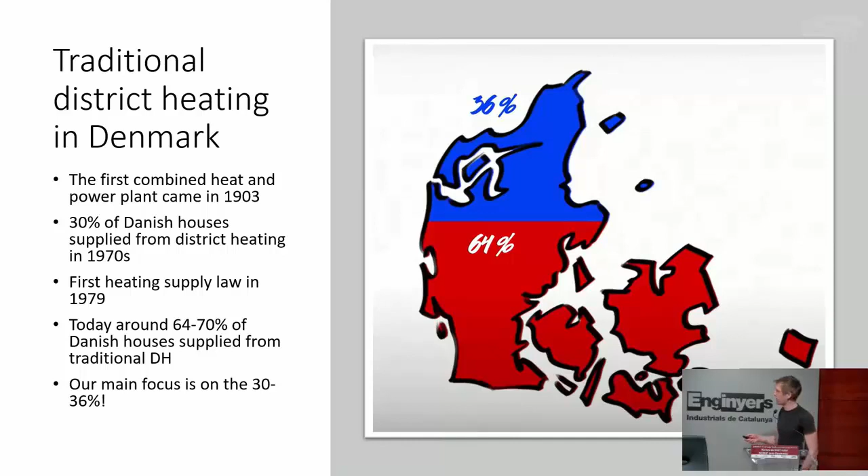But a third of the country does not have district heating, because we have a lot of natural gas and other sorts of heating supply in those areas. There's quite a good reason for that, because the paradigm we've been working with in Denmark up until now has been that heating is a matter of combustion—you have to burn stuff to get heat.

Denmark is a fairly cold country. You can see from the whiteness of my skin that we don't get a lot of sunshine. So we don't actually think a lot about cooling in Denmark, but that can become a problem because we think a lot about insulation, and we do get some warm summer days.

The paradigm we have established in Denmark is that cities have centralized combustion units that distribute heat through insulated pipes at fairly high temperatures. We are trying to lower it, but we don't get below 60, 70 degrees because we need to supply hot water. Rural areas have a problem because the energy density is not high enough for this scheme to work, so we have natural gas, oil boilers, wood burners, and stuff in the rural areas of Denmark.

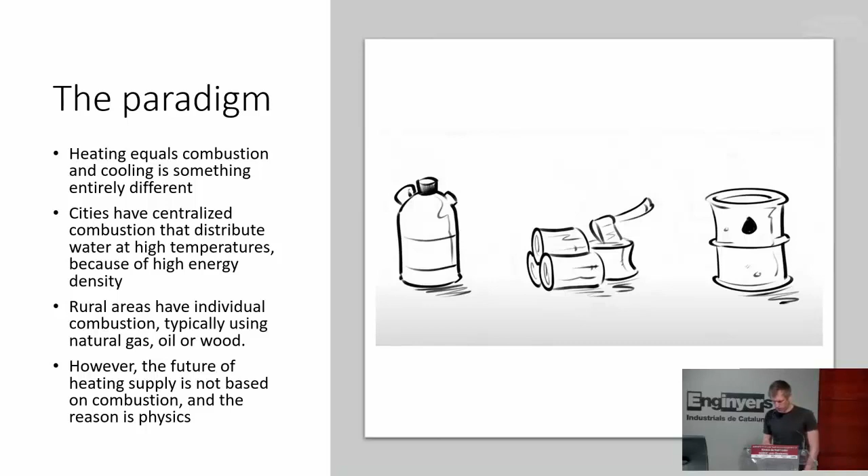But the future of heating supply is not combustion, it's heat pumps. I'm sure all of you have already heard that. I have recently become very fond of saying that this is not a matter of politics, it's a matter of physics. But of course, physics is not always the thing that gets into the politics.

So I like to show this slide about how you can use 1 cubic meter of natural gas. This is from an old cartoon we made in 2017. You can use, in Denmark, 1 cubic meter of natural gas to burn at the house in a natural gas boiler, and you get 11 kilowatt hours of heat from that 1 cubic meter of natural gas.

But you can also do something we are fairly good at in Denmark: move the natural gas through the pipes to a combined heat and power plant. Then you can get 5.5 kilowatt hours of heat and 5.5 kilowatt hours of electricity, roughly.

You can transport the electricity to a house that has a heat pump connected to the ground, and you can multiply the heat by extracting heat from the ground and get somewhere between 22 to 27.5 kilowatt hours from the same cubic meter of gas. So you can more than double the outcome of heat from the same resource if you utilize heat pumps.

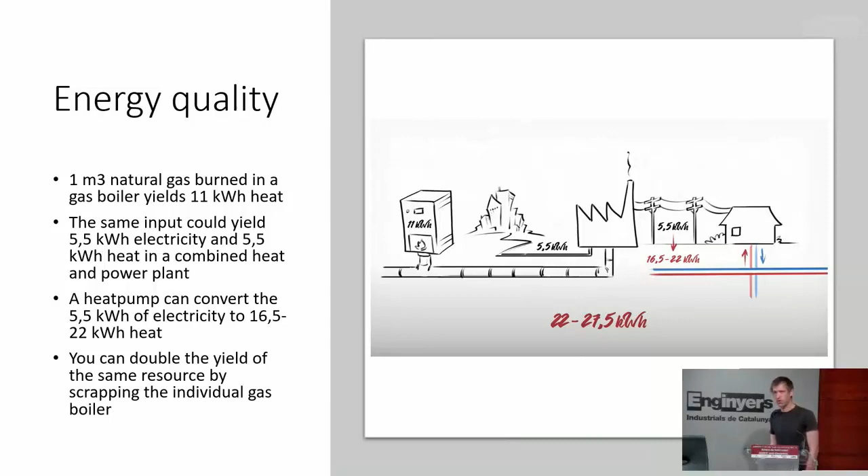This scheme of combustion in order to get power makes me sick to think of. It is so wasteful. It is just the old foolish Prometheus idea, and the father of Prometheus was a baboon. When we learn how to store electricity, we will cease being apes ourselves. Until then, we are tailless orangutans. We should utilize natural forces and thus get all of our power. Sunshine is a form of energy, and the winds and the tides are manifestations of energy. Do we use them? Oh no, we burn up wood and coal as renters burn up the front fence for fuel. We live like squatters, not as if we owned the property. There must surely come a time when heat and power will be stored in unlimited quantities in every community, all gathered by natural forces. Electricity ought to be as cheap as oxygen, for it cannot be destroyed.

So this is 1910, Thomas Edison. More recently, but still a long time ago, the American Amory Lovins made a similar statement, just much more politely and using scientific terms.

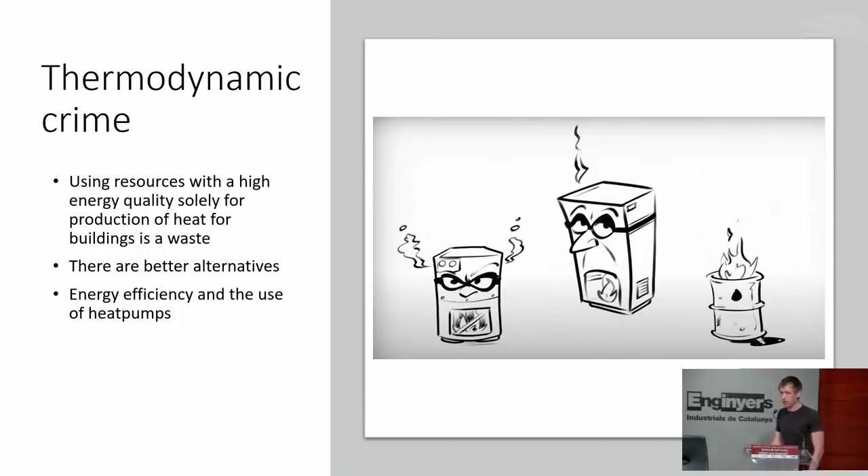As one of the speakers said, there is no good or bad energy, but there is definitely bad use of energy. Burning different sources like gas, wood, and oil for heating houses—that's low quality heating, that's a bad use of high quality energy. So this is just a way of portraying it as a thermodynamic crime. It does not make sense to do that. It's not to shame anyone, it's just saying don't continue down that road because it's not a good use of resources. There are better alternatives, and they are energy efficiency and the use of heat pumps.

When we talk about heat pumps, air is not a good medium to do that. This is a small drawing illustrating that.

This is a fairly known scenario in Denmark where there are 0 degrees Celsius outside. Let's imagine the building on the left is a freezing house where we store goods that need to be frozen, and on the right is a storage house that just needs fair storage temperatures. What the heat pump does is move heat out from the blue building, and on the other side it moves heat from the air into the building. So we have one heat pump on each house.

Now the problem is that we use air a lot as a heat source, but it's not very efficient, because when the air is cold we need the heat, and when the air is warm we need cooling. So there is a better way of doing that.

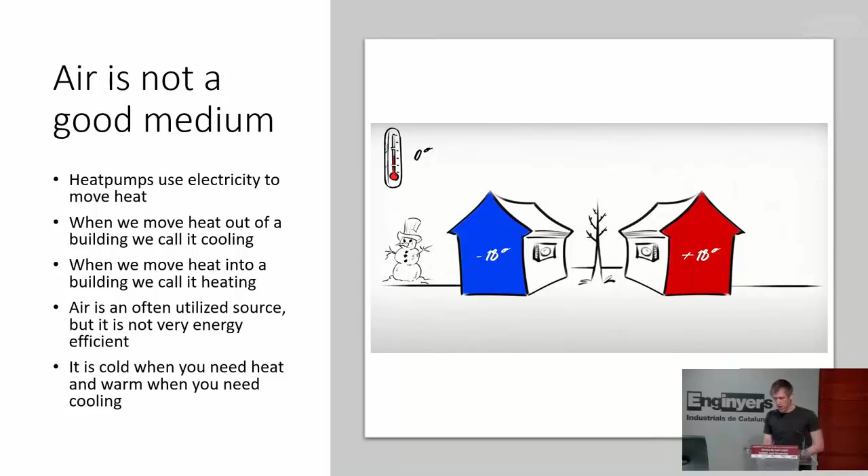The better way is to use shallow geothermal as a medium, because the Earth is a fantastic storage for heat when the temperature is low, because the ground is cool when the air is hot, and the ground is hot when the air is cool.

The other part, probably in my view the most important one, is that it's not noisy and it's not visible. You have a beautiful city here in Barcelona, but you have a lot of these air conditioning units. It would be good for the energy system to get rid of them. You would have more efficiency and a better use of energy, and it would brighten up the city.

We often overlook that from the technical perspective, we're just solving a technical challenge, but in the big paradigm of preserving a nice city, this should matter much more than anything else, the noise and the looks of things.

So what we can do when we start doing this, we can reduce the number of units. We can move the heat from the building that needs to be cold to the building that needs to be warm, and have fewer units, fewer heat pumps. Now this is of course just an illustration that works for this specific scenario, but I'll get back to that later.

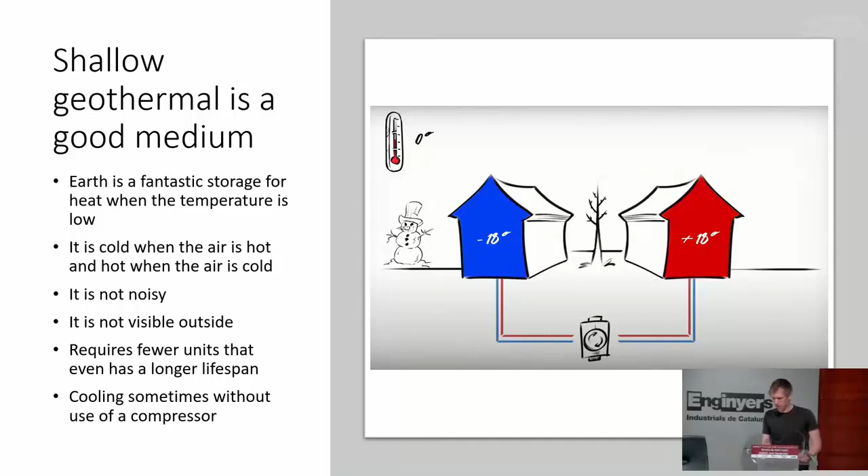The benefit of passive cooling I'll demonstrate with a simple graph from two buildings in Denmark on one of the days that in Denmark is hot. You see an average temperature rising up around 29 degrees. I know that's not really hot for these areas, but in Denmark we call that a very hot summer day. There are two different houses.

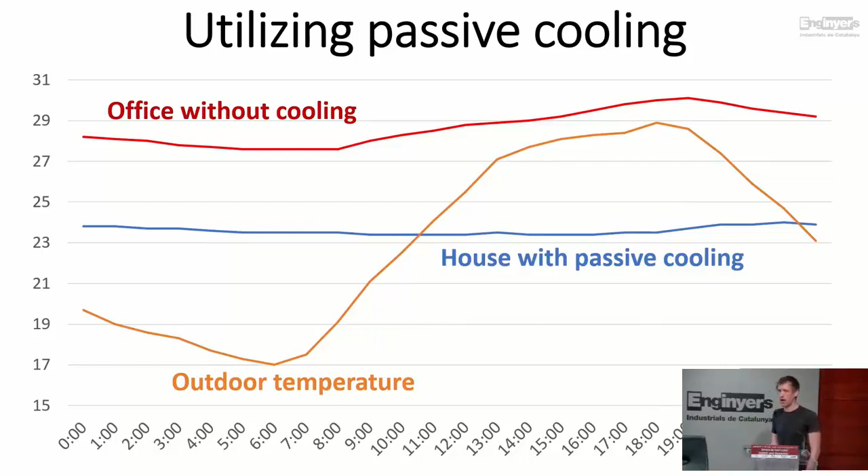There's an office building that doesn't have cooling, but it's very, very well insulated, so it can save energy in the winter. But that also means the heat inside the building is actually much warmer than outside, even during the nighttime. And then there is a house that can utilize passive cooling. It's just as well insulated, but you can move heat out of the house with boreholes.

This is where the idea of the Thermonet comes in, because with the Thermonet you can start connecting multiple houses and you get a bigger battery in the ground you can use to balance out the energy demands. The Thermonet is defined as a thermal grid that transports energy from different sources, crossing cadastral boundaries, at a temperature relatively close to the temperature of the ground.

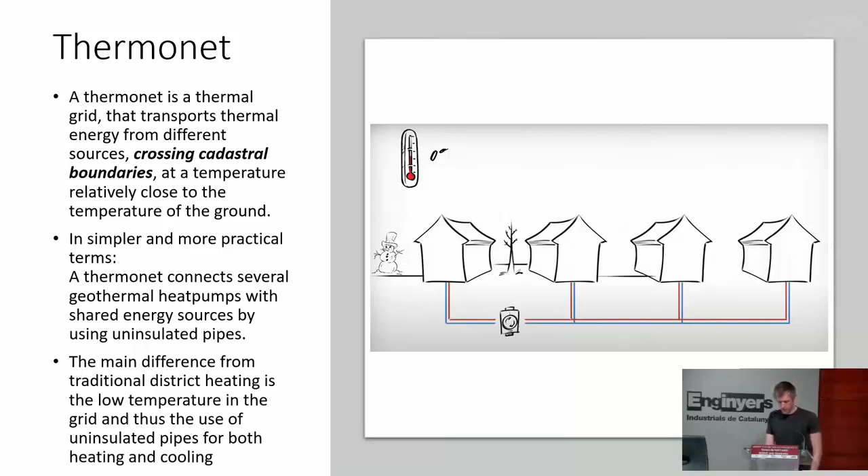So no insulated pipes - uninsulated pipes. That's one of the paradigm shifts, uninsulated pipes. In very simple terms, a thermonet connects several geothermal heat pumps with shared energy sources by using uninsulated pipes. The main difference to traditional district heating is the low temperature. Many of the other principles are the same that we know of in Denmark.

But you could also do the thermonet in combination with fourth generation district heating. So you have the fourth generation network putting out insulated pipes to the buildings from a geothermal heat pump of a bigger scale, and then you connect these big geothermal heat pumps with a thermonet of uninsulated pipes to the heat source.

In Denmark, we see a lot of private customers putting up air-to-water heat pumps, and we see a lot of utility companies putting up very big air-to-water heat pumps. And as I just showed you, air is not super efficient. There is a better way of balancing the energy demand with geothermal.

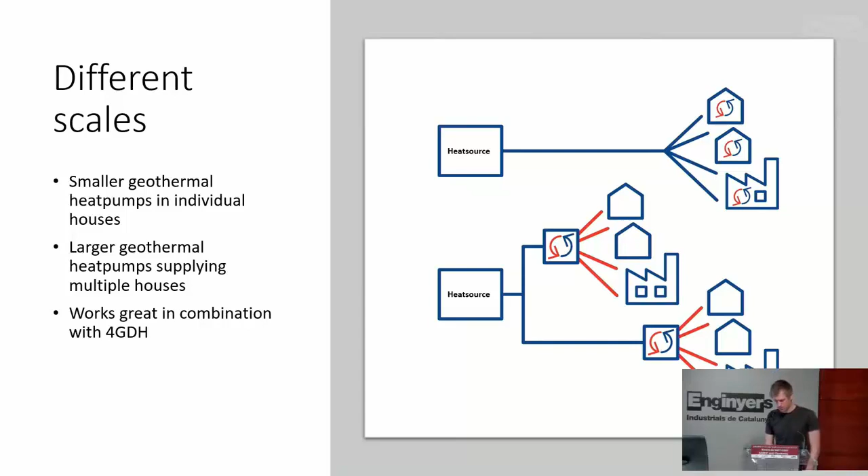So what are the novel issues we can solve by making a paradigm shift to the fifth generation of district heating? Well, there's a lot of academic discussion whether the fifth generation actually exists, and that mainly comes from researchers in fourth generation who think that this is a well-established concept and there's no need to have a fifth generation, because they already include in the fourth generation what they think the fifth generation set out to do, mainly introduce heat pumps and renewables.

But that's not at all what the fifth generation's most important contribution is. The most important contribution is that we extend the reach of district heating. In Denmark we usually say we have around 60 to 66% district heating coverage, and some cities don't have access to it. The most ambitious plans for Denmark are to increase district heating to 70%, but that's only from the fourth generation perspective. If we look from a fifth generation perspective, energy density is not important anymore. There can be bigger distances between houses, and it would still make sense to do district heating with a thermonet. So we postulate that you can go up to around 90% or even more district heating coverage in Denmark if you use fifth generation.

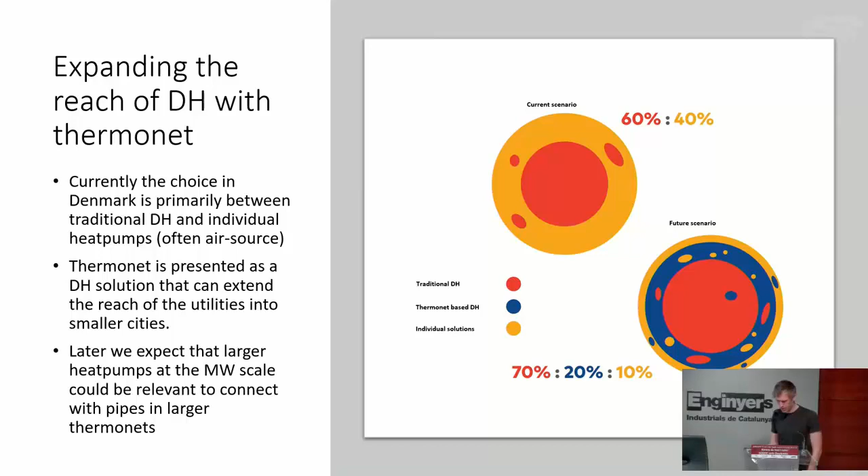So how do you introduce a paradigm shift? Well, one of the things we have found in Denmark works very well is to use a word that no one has ever heard of before, and that is thermonet. When you talk about these generations of district heating, you come across the issue that a lot of people think they know what you're talking about. They think they know it's about some insulated pipes and that you're just lowering the temperature even further. But that's not the case with a thermonet — you're pulling the insulation off the pipes. So in order to establish a common understanding, it's very good to start from a completely blank sheet.

So we introduced this word, thermonet, in Denmark, and we made a non-profit association to promote the spread and development of the thermonet.

The heat pumps are coming in Denmark, we know that for sure. We are just working to make them connected with pipes instead of being air source heat pumps. And we really stress this synergy between heating and cooling, because it's so beautiful to see when you remove heat from a building that you put it into use in another building instead of just cooling into the air. And we really want the thermonet to enjoy the same benefits that traditional district heating has in Denmark through the heating supply law.

And we have a wide array of members. We established the organization in 2020, just before the virus hit, so we set out to be a virtual organization. We hold mainly virtual meetings because we want to span as wide as possible. We have 25% of the Danish municipalities as members of the association now, and we have utility companies, installers, contractors, manufacturers, academics. We have a wide array of members, and that is exactly what you need for a paradigm shift.

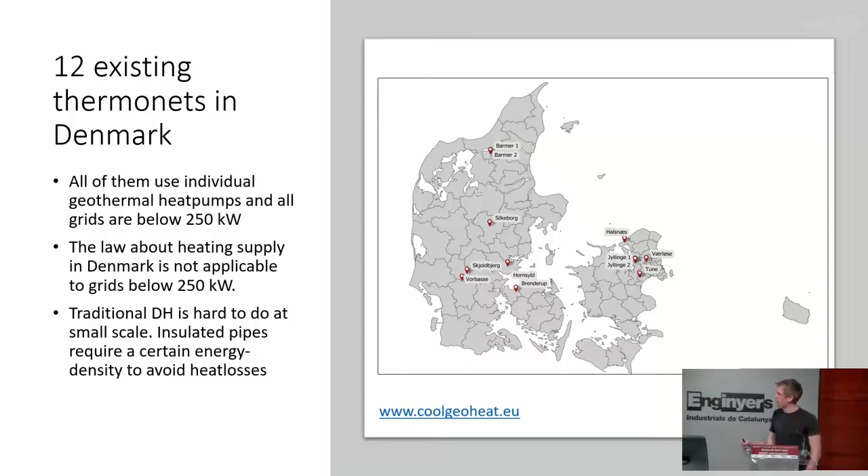The traditional district heating is very hard to do in these places. It's simply not offered, because we don't have the energy density in these areas to provide traditional district heating.

Now this is the lighthouse project that is currently under construction. This is the first district heating grid based on a thermonet in Denmark that is above 250 kilowatt, and thus constructed under the heating supply law. And it's a local district heating company that constructs the grid.

And this is where the societal benefits come into play, because this small rural city, they don't have a lot of opportunities to borrow money for renovation of their homes, and they don't have a lot of opportunity for borrowing money to establish heat pumps. But the local district heating company, they can go into a city like this and offer them, for an investment of zero, to get their oil boiler exchanged with a geothermal heat pump.

And the only thing the customer has to do is sign up to become a co-owner of the district heating company. So it actually sounds like an offer that's too good to be true, but this is the way we do district heating in Denmark.

It's also the way we do our electricity supply. All the major utility companies are owned directly or indirectly by the citizens themselves.

So this way, there's a bore field constructed with, I think it will be 23 boreholes, geothermal boreholes, connected with a grid throughout the city. And everyone who wants to participate can sign up, and those who want to wait for some reason can wait.

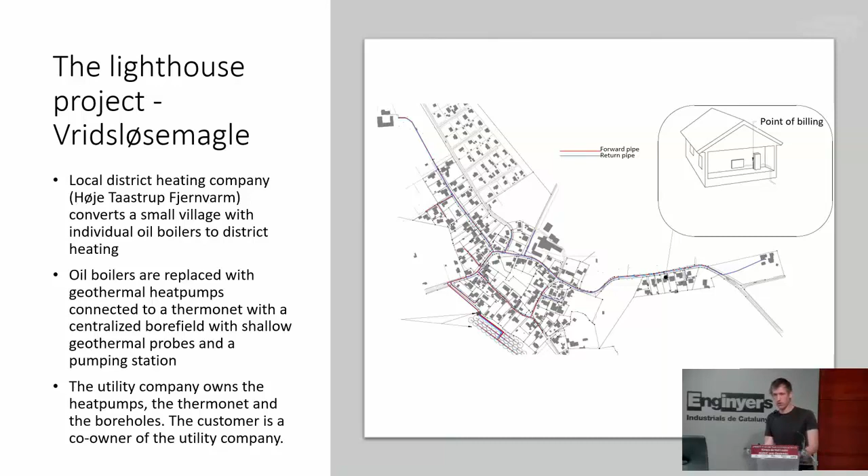We expect that many will take the utility company up on this offer as soon as they see the need to replace their oil boiler or air source heat pump. So this is what we think will be a lighthouse project for other utility companies in Denmark, and we see a lot of projects on the move, and this is one that is the furthest to become a concrete reality.

So in Denmark, we have seen the effectiveness of having this association, Thermonet Denmark. And we see a lot of municipalities offering their rural cities to look into, is there a possibility to create these thermonets in their cities?

And a lot of the municipalities are putting thermonet into their strategic energy plans, and a great reason for this is the non-profit aspect of our association, and the willingness from our members to share information on a volunteer basis.

So we envision that Europe could need a Thermonet Europe association, because there are a lot of names for what we're talking about today. There is the fifth generation district heating and cooling. I sometimes joke that I get tired just from pronouncing it. So we use the abbreviation, that's not much better. And then it's like all countries have their own way of talking about this.

So there are the shared ground loop arrays, I think it's fairly common in the UK. And then we have the geo-microgrids, that's from the US. And geothermal networks, that's a new one I've heard from the US as well. And the ambient loops is somewhere around Switzerland, but also in use in the UK. It's just the same, so basically it will give you the same benefits.